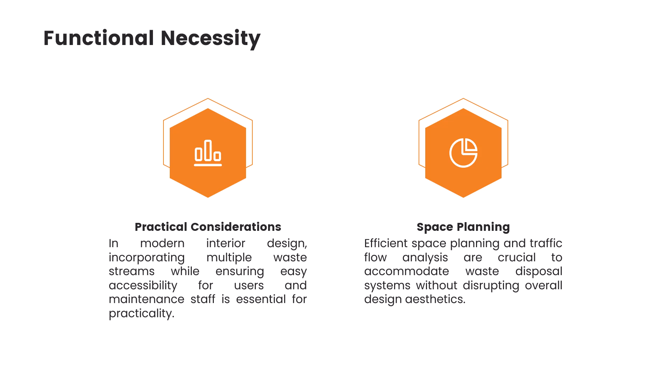So it is very much essential how we incorporate all the waste disposal systems along with the interior design aesthetics. It is a combination of both. We have to consider the waste part as well as the aesthetic part while designing interior projects.

Next is environmental responsibility. Each person is responsible for environmental concerns. For example, sustainable practices: we have to think about the economic factor, social factor, as well as the socio-cultural factor. In today's world, when talking about interior design, we are mainly focused on environmental aspects.

In interior design, sustainable practices incorporate features such as built-in sorting stations and smart waste management systems, to make recycling and waste reduction intuitive and effortless. It is very much essential.

Next is minimizing the environmental impact. Whenever we implement or execute spaces, we have to think about sustainable waste practices along with reducing the environmental impact while handling waste. It is very much essential.

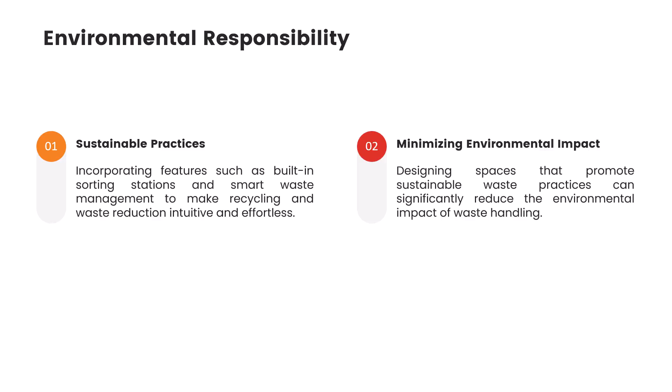Next is design aesthetics. Whenever we talk about waste disposal, there is a mindset that waste disposal always looks dirty—it's the ugly thing in the building. But it is the responsibility of an interior designer to make these elements aesthetically pleasing through interior design projects.

One aspect is visual harmony: creating waste management solutions that complement the visual appeal of spaces, like architecturally striking waste chutes and beautifully designed sorting centers. All the sorting centers, disposal elements, and refuse chutes should be part of our design.

Next is the innovative approach. Through innovative design solutions, we can make waste disposal systems part of the design aesthetics. Integrating waste disposal systems into the overall design scheme reflects innovation in balancing function and aesthetics. Waste disposal is part of function, while our main motive is to present everything in an aesthetic manner. We combine both to create an innovative design approach including function and aesthetics.

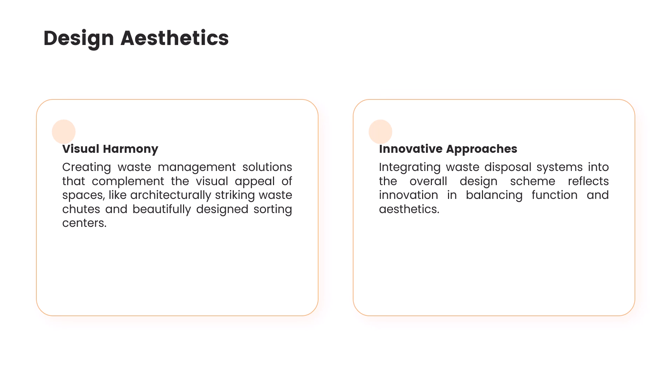Now the key concepts and terminology in waste disposal systems: the building services terminology or glossary.

First is the waste chute: strategic planning for vertical passages to ensure efficient and hygienic waste movement with minimal travel distances from waste collection points. In today's world, with the concept of vertical housing and high-rise buildings, it is difficult for each family or unit to go down to put waste in a container. So we have vertical refuse disposal systems, called the refuse chute. We have to consider hygienic waste movement along with minimal travel distance to waste collection points.

So it is very much important, and the waste chutes are the solutions for that. Now the compactor, a mechanical device for waste volume reduction, requires proper integration with building systems like compaction equipment. This is a particular kind of device where we compress all the waste to reduce its volume.

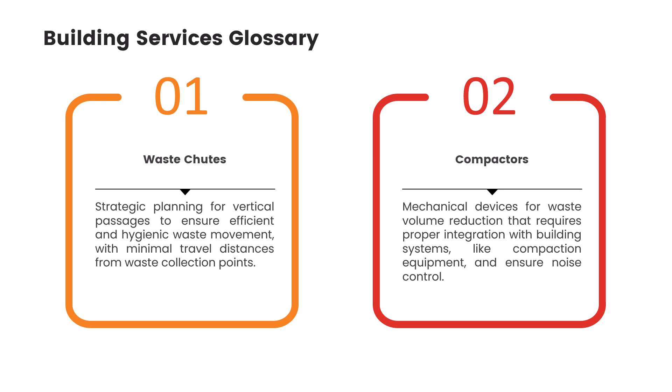As it is a mechanical device, it produces some kind of noise, so we have to ensure that it should not disturb the family members. We need to ensure noise control for that. These are some examples or visuals for chutes and compactors.

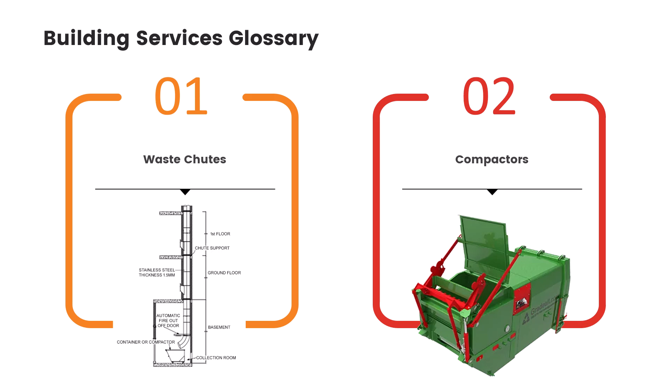Now the segregation and recovery systems. In segregation systems, different types of waste are there: wet waste, dry waste, sanitary waste, and e-waste. They have different color coding systems: wet for green, dry for blue, sanitary for red, and e-waste for gray color. So we have to segregate this waste systematically, and for that we need awareness, clear signage, and educational programs for proper waste segregation, so there should not be any problem when there is a compactor or waste segregation system.

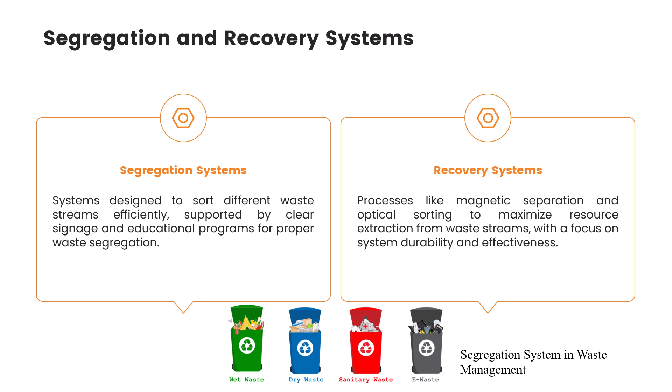Another system is the recovery system, processes like magnetic separation and optical sorting to maximize resource extraction from waste streams, with a focus on system durability and effectiveness. So we have to think about the system durability, the long term feasibility, and the effectiveness, so there should not be any disturbance while separating the waste. This is the management system for the waste.

Next, this is the overall scenario of how recovery systems in waste management work. First is from the house level, waste generation, from segregation of waste in separate bins, as I told you, in green, red, blue, and gray colors. Then waste transportation systems, then we have a transfer plant to direct landfill, where this waste can be used in the landfill process.

And there is a recycling process: organic waste, recycling waste, biogas in cylinders, biodigesters, fertilizer plants. This waste can be used for different purposes, like dry waste can be used for something, wet waste use can be something, and from the waste we can generate electricity from biogas systems. So these are the recovery systems in waste management, and these are very much helpful for our day-to-day life.

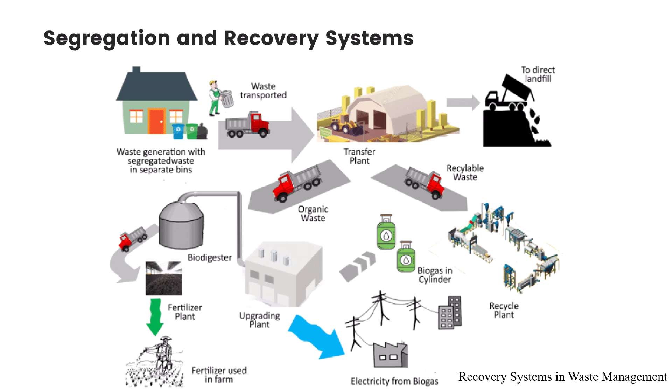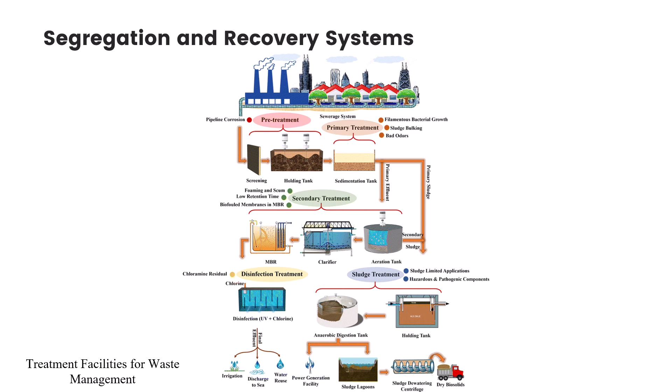This is another treatment facility for waste management. This is the overall flow of the diagram, so you can see and read this diagram.

Now we have principles of sustainable waste management. We have a particular term, the waste hierarchy. Hierarchy means we have to give some kind of priority to something. Priority is given to reducing waste generation, reusing materials, and recycling. This principle should guide the design of waste management systems from the start.

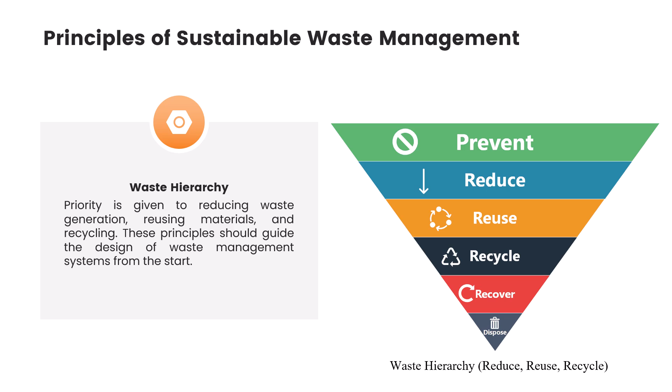So in the waste hierarchy, first of all we have to prevent something; we should not use such kind of waste which is not biodegradable. If it is not possible, then you can reduce it, don't use it, or we can reuse it. At the end we can recycle it. After recycling, some of the waste goes to the land, so recovery, and at the end dispose. This is the hierarchy of waste management systems that we should follow.

Next is another principle of sustainable waste management, the circular design thinking. We have natural resources, then extraction of raw material, then design and production, packaging and distribution, use and maintenance, disposal. In between we have disposal, recovery, reuse, recycle. So we have to follow all this hierarchical process and use sustainable waste management in a particular way.

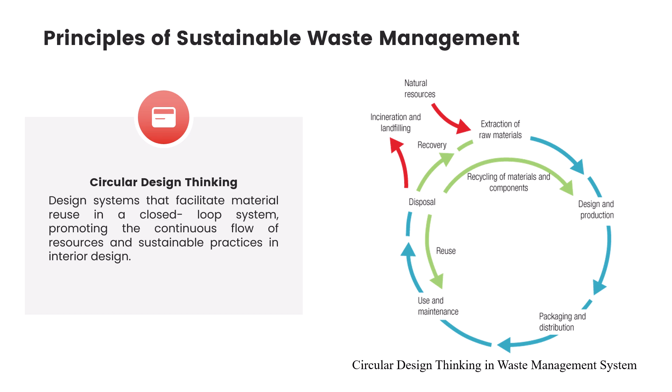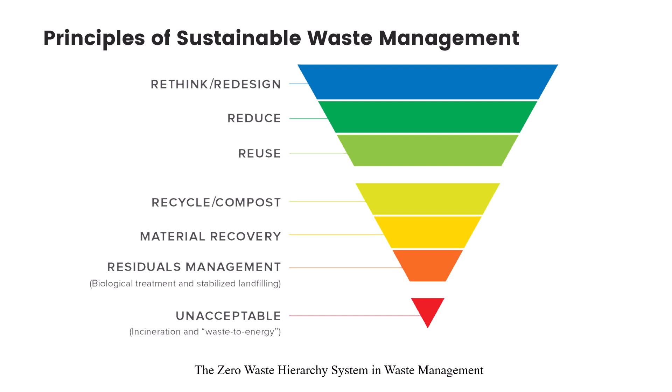This is another one, the zero waste hierarchy system in waste management: we have to rethink and redesign, then reduce, reuse, then recycle or compost, then material recovery, then residual management, like biological treatment and stabilization of landfill, and something we can say unacceptable, that is waste to energy. So this is the hierarchy for the zero waste hierarchy system.

There is another principle of sustainable waste management, the smart waste management system via IoT, Internet of Things. The acronym SMART stands for: S for specific, M for measurable, A for attainable or feasible, R for relevant, so our waste management should be relevant, and T stands for time bound.

So we have to think the smart way of waste management systems - reductions in collection cost, no missed pickups, proper segregation, reduced overflow. Whenever we have overflow, that overflow will land somewhere else. Then waste generation analysis - we have to allocate budget, labor, materials, transportation systems. We have to manage everything, so there should be a waste generation analysis so that we can allocate proper resources to a particular station. At the end we have to think about carbon dioxide emission reductions.

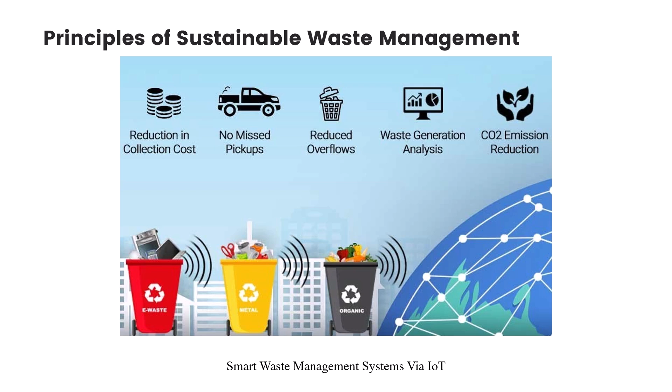So that is the thing for IoT, Internet of Things. We have to do all kinds of analysis of where the dumping ground is, and we should know when it is going to be full.

Next is the scope and objectives of the waste disposal systems. The overview of waste disposal - the first point is collection and segregation systems, which we have already discussed. Then transportation methods within buildings - within buildings we have refuse chutes, segregators, and compactors.

Then storage solutions. It is very difficult for the municipality to collect day to day from buildings, so it is advisable that buildings store waste for 2 to 3 days or on a weekly basis, and wait for the municipality transportation systems so we can dump it there.

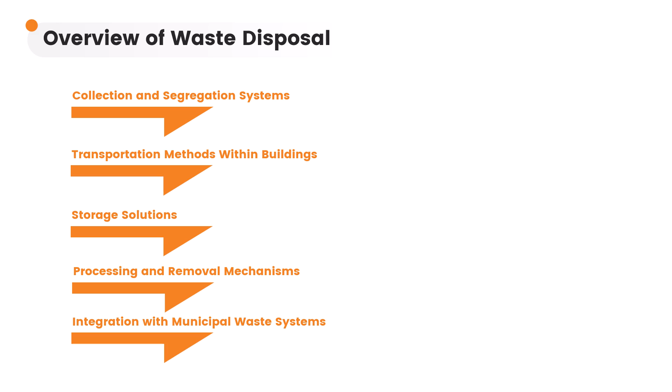Then the processing and removal mechanism - that is done by the management, the municipality people. Then integration with municipal waste systems - municipal to municipal, we have dry waste, wet waste, that is their duty. So this is the overview of waste disposal systems.

Next is the objective of waste disposal - why are we doing all this waste disposal or waste management? The first point is maintaining hygiene and public health standards. If you are not collecting waste properly, there will be different types of diseases and unhealthy situations.

Then next is maximizing operational efficiency. Operational efficiency means, as I told you, budget, labor, materials - we have to think about all these things in an efficient way.

Next is minimizing the environmental impact. We should not harm the local environment - for that we have to do waste disposal systems, waste management systems.

Next is ensuring aesthetic integration with design schemes, whether interior or exterior. We have to think about aesthetics as our priority as an interior designer or architect, so these waste management systems must integrate with both the function and aesthetics of the building.

Next is supporting sustainable building practices. Now we have different types of star rating systems for buildings - for getting a 5-star, 4-star, or 3-star rating, we need proper waste management systems to support sustainable building practices.

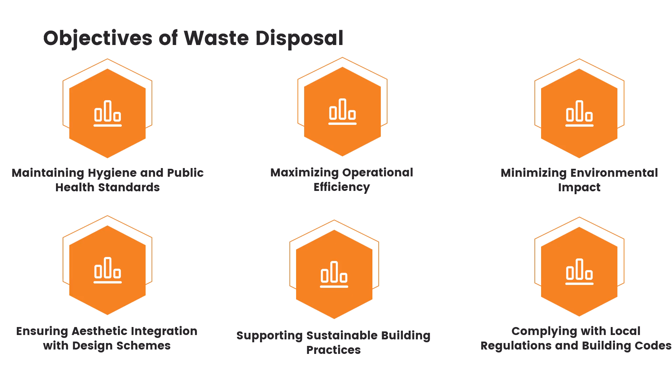Now the different types of waste disposal systems. One is recyclable materials - waste that we can recycle and reuse for different purposes. Then organic waste, which can be used for agriculture. Next is general waste, which can also be recycled. And hazardous materials like e-waste, which is most dangerous and should be handled with proper care during solid waste management.

Next is liquid waste management systems, the gray water systems. Gray water is the used water from kitchens and bathrooms. Then there is black water management - black water is used for excreta. So one is called sewage and sewerage, and sewage refers to the gray water systems.

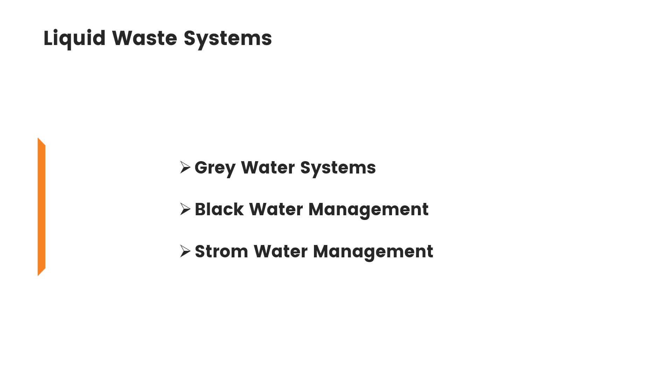Sewerage is the black water management system. Another is storm water management. Whenever we have a building, the rooftop collected water should not run away from our site, it should be used on our building site itself. For example, we can use it in the landscape part, fire emergency part, for flushing, or as part of black water management systems. We can use storm water in black water systems, and sometimes we can refine it and use it in gray water systems too. There is also specialized waste - medical waste in healthcare facilities, chemical waste in laboratories, food waste in hospitality industry settings. We have to take care of all this waste effectively for sustainable development.

Now the importance of building services in waste disposal. Integration with building mechanics - for example, vertical transportation, we have lifts, we have staircases. Near the lift or staircases, we have vertical transportation for the waste, for example refuse chutes. Then continuous vertical alignment and structural considerations. During structural calculations, architects should think about the function of waste so they can provide particular refuse chutes as part of other structural management systems.

Then the ventilation systems and odor control. This is most important whenever we are disposing our waste. The ventilation systems and odor control, wind directions, sun directions - all this comes into play. So we have to think about the ventilation systems and odor control.

Next is the load bearing considerations for terminal points. At the end, we have to collect all our waste in particular disposal systems. These disposal systems collect together and are passed to transportation systems like municipality trucks or hand pull systems. We have to collect and deposit that to the municipality trucks. So how to carry the load and manage all these things is also important for a designer.

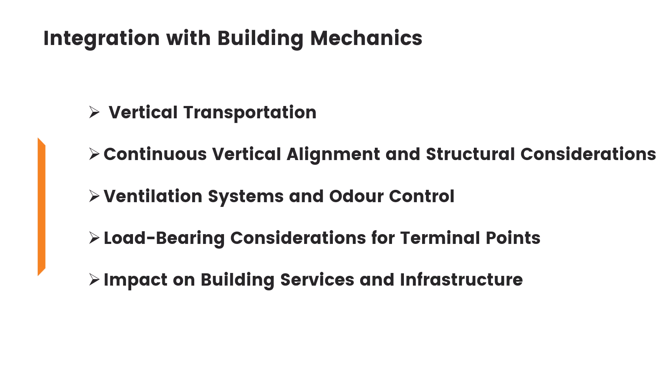Now, impact on building services and infrastructure. Overall, this should not give more impact on building services and infrastructure. Waste is something tangible, we can carry it from one point to another. For that we have manual systems and mechanical systems. At the end, it should not give more impact on building services and infrastructure - something we have to hide, but use in a proper way.

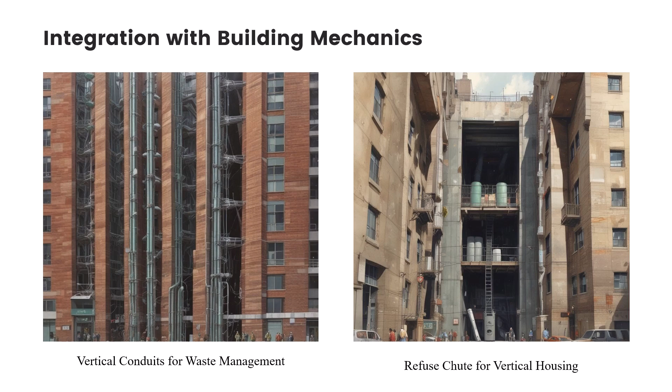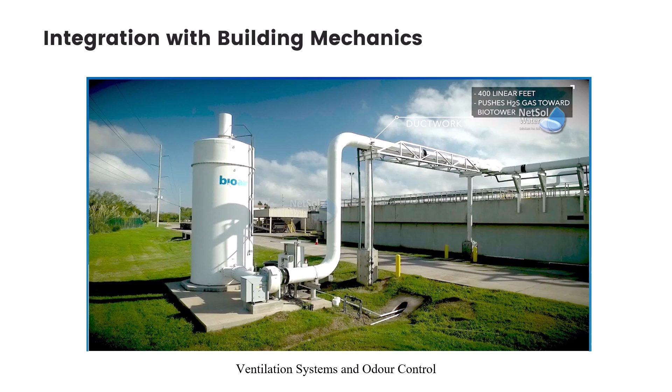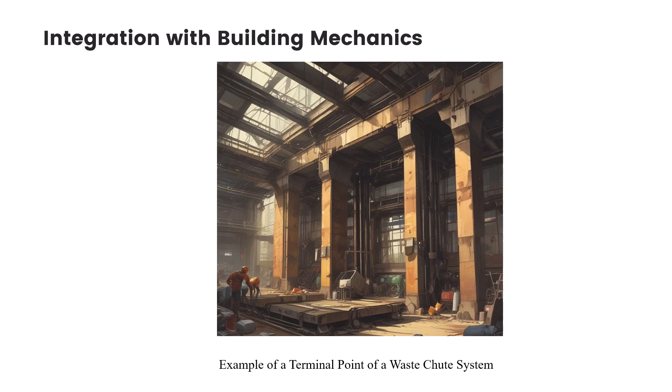These are some examples or images like vertical conduits for waste management. These are the refuse chutes for vertical housing. This is the ventilation system and odor control wherever we have bio-air systems. We have to consider all these things for odor control and smell control. Example of terminal points of waste chutes - it should be collected in such a way that it can be easily transferred from one place to another.

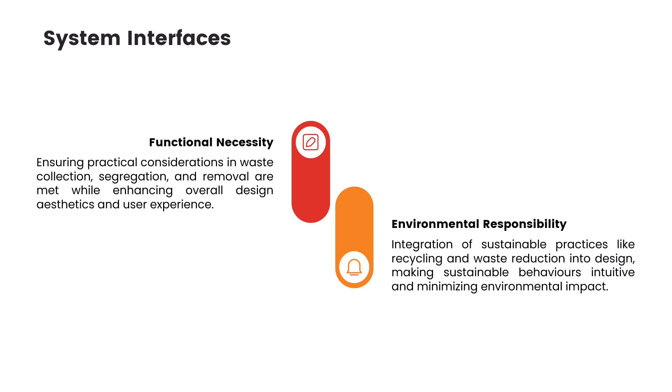Now, since system interface, like we have to have our IoT, Internet of Things, ensuring practical considerations in waste collection, segregation and removal are met while enhancing overall design aesthetics and user experience. Another is environmental responsibility - we have to be responsible for the environment. Integration of sustainable practices like recycling, waste reduction into design, making sustainable behavior intuitive, and minimizing environmental impact. We have to think about net zero carbon systems in our building.

Then space allocation for waste management facilities and collection points - the efficient design of collection points including floor to floor level, housing unit level, then central waste rooms to manage waste efficiency, then building level, building to building level, then site level. All these collection points should be designed carefully.

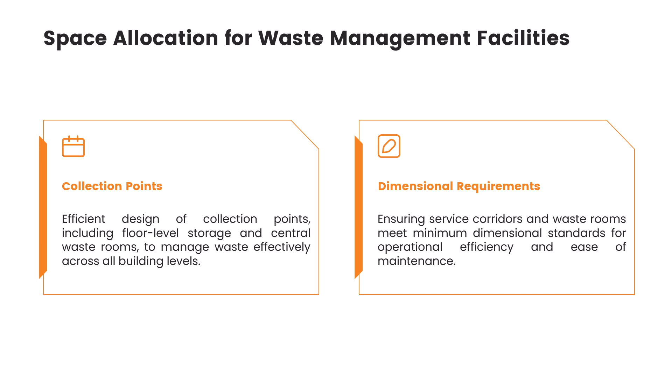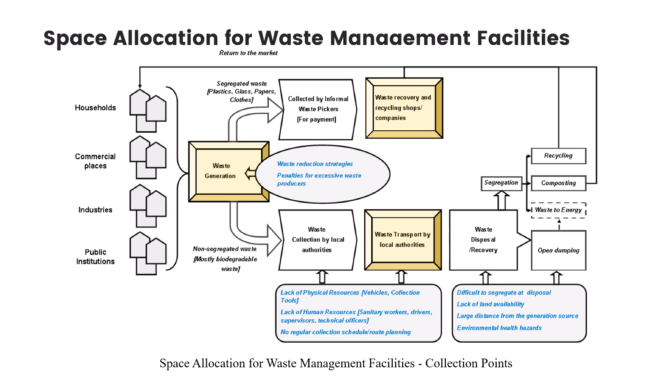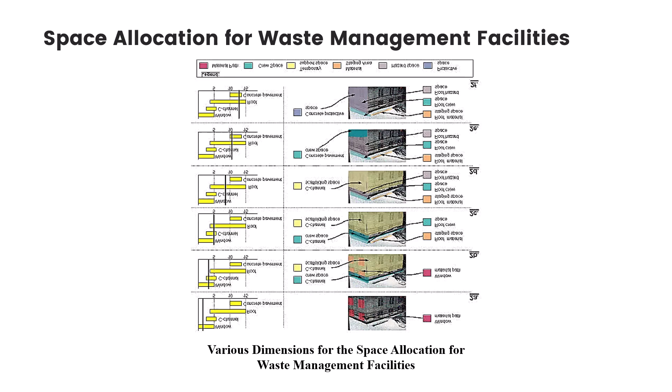So these are something like 3D MEP coordination with mechanical, electrical, and plumbing systems. For mechanical, we have different types of waste: dry waste, e-waste, industrial waste, hotel hospitality waste. These are carried out through a combination of mechanical, electrical, and plumbing. Overall, we can say it is MEP systems. In MEP, there should not be any disturbance or overlapping between the mechanical, electrical, and plumbing systems, so we have to consider all these things while planning waste management facilities.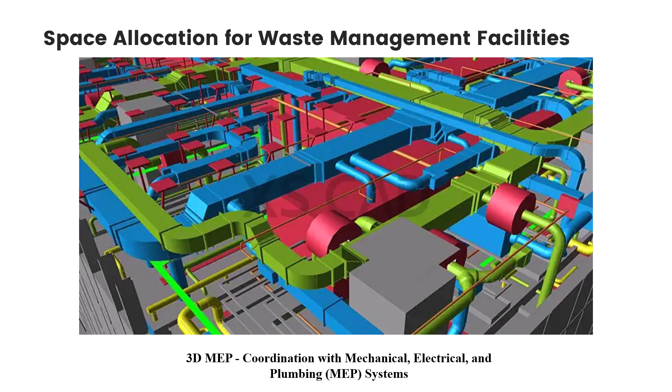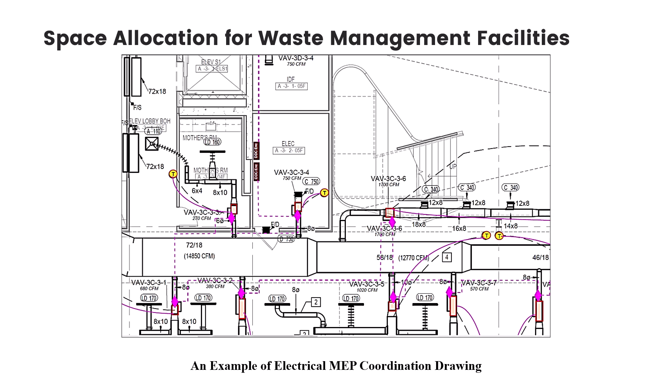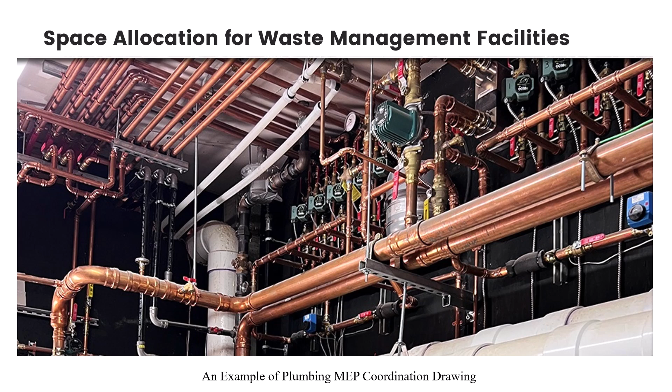These are AutoCAD layout drawings, electrical MEP coordination drawings, showing where we should have our electrical points and their use—we have to think about all these things simultaneously. These are examples of plumbing MEP coordination drawings, the 3D view of plumbing systems. So overall, electrical, mechanical, and plumbing—everything we have to consider as a whole while considering waste management.

In every building service like waste disposal, everywhere we have some kind of limitation and challenges. So how do we overcome that? Let's discuss the space constraints in urban buildings. People are thinking more about minimizing their spaces, and at that time they are not thinking about the services part, especially waste disposal. So it is very much important.

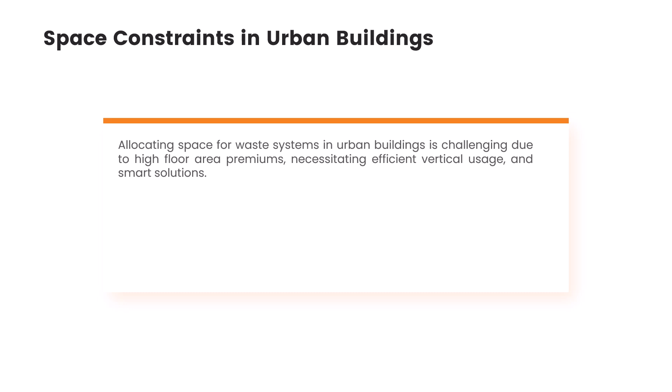Allocating space for waste systems in urban design is challenging due to high floor area premiums—all floor area is very costly, so thinking about waste disposal is often neglected, necessitating efficient vertical use and smart solutions. These are the ways to overcome this in urban buildings.

Now, integration with existing infrastructure. Every day we have upgradations of building services systems. Adaptation of modern waste systems into existing buildings involves overcoming structural and utility limitations, requiring substantial modifications and careful planning. At the end we have to do it, but it is a challenge integrating modern waste management systems with existing infrastructure.

Now, maintenance accessibility—in urban areas we have very compact buildings, so accessibility is an issue for waste management. Ensuring regular system maintenance without disrupting building operations demands accessible design and strategic placement of service corridors and maintenance spaces. So we have to consider this particular thing, maintenance accessibility.

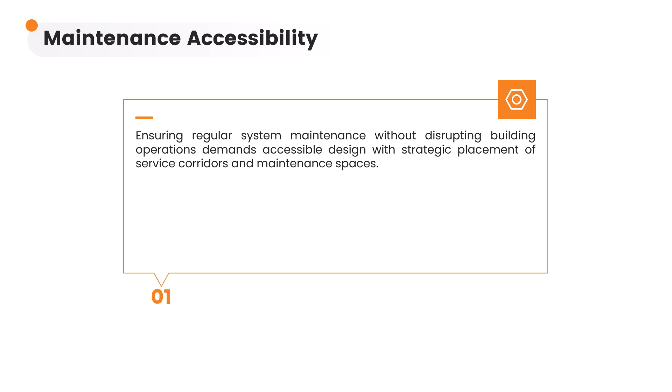Now the SWOT analysis—what are the strengths? Strengths are like improved public health hygiene and enhanced building efficiency. These are the strengths of our waste management systems.

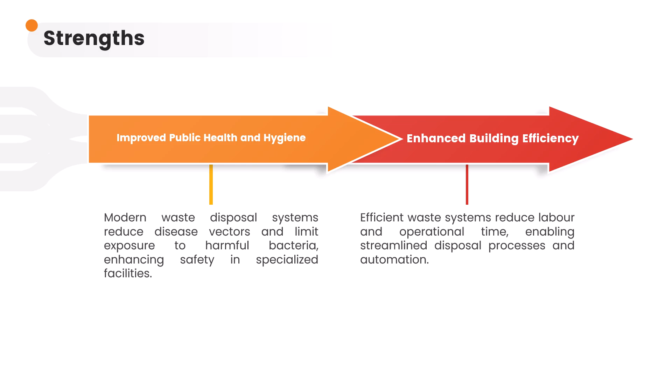The weakness is high initial implementation cost—whenever we provide modern waste management systems in our building, it is a little bit costly. So the initial implementation cost is very high. However, the payback period is also very low, so we have to consider this thing.

The space requirement—again, as discussed, in urban areas we have very limited space. So for considering waste management systems, we have to think the SMART way: specific, measurable, attainable, relevant, and time-bound. These are the weaknesses, and smart solutions are the way to overcome them.

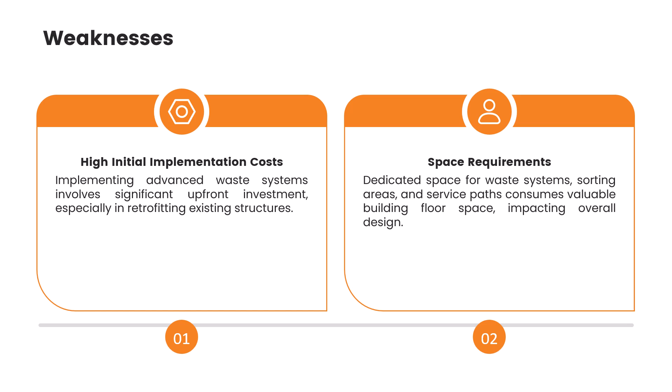Opportunities are the futuristic fix—innovative sustainable solutions. Day to day we have upgradations in waste management systems, so waste processing units that integrate well with modern design are the innovative solutions. Innovation in sustainable solutions is our futuristic focus: how to reduce sizes and develop highly efficient mechanical, electrical, and plumbing devices.

MEP systems—coordination between electrical, plumbing, and mechanical devices is very essential, and that is the future of our waste disposal systems. Now, smart technology integration, IoT systems are there.

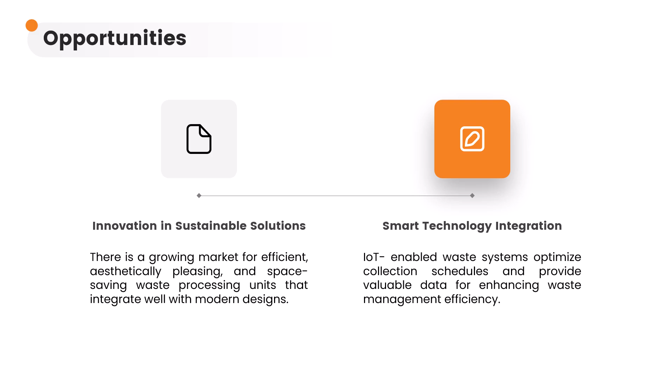From the system itself, we should know where we have maximum waste and where to put different waste bins. These waste systems optimize collection procedures and schedules, and provide valuable data for enhancing waste management efficiency—how to use maximum labor, how to optimize time and cost. Overall, optimizing cost, time, and labor is what smart technology integration with the help of IoT provides. That is the futuristic opportunity for the waste management system.

Now, there is always a threat in the future: challenging regulations. Every day in our life, regulations involve things like projects—projects run for 1 to 2 years, programs run for 2 to 3 years.

Then we have a comprehensive plan, and a master plan for 20 to 30 years. Every day there are changes in regulations—evolving waste management legislation could necessitate costly system updates, which may render existing systems non-compliant and obsolete. So with new rules, regulations, and building bylaws, old systems may become non-compliant or obsolete, and we have to take approval with new management systems. So there are challenges and threats we have to consider.

Now let's discuss some case studies. In commercial building systems, integration with building management systems and implementing automated waste sorting are the two major things we have to consider.

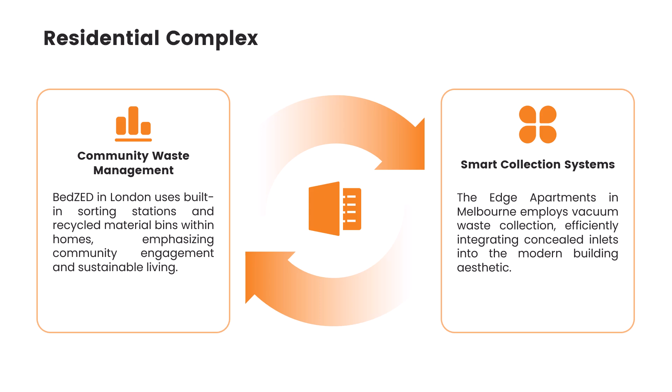This is the innovative design we expect from students of architecture and interior design—to use function and aesthetics combined, integratively. That will be the future of waste management systems in our interior design services.

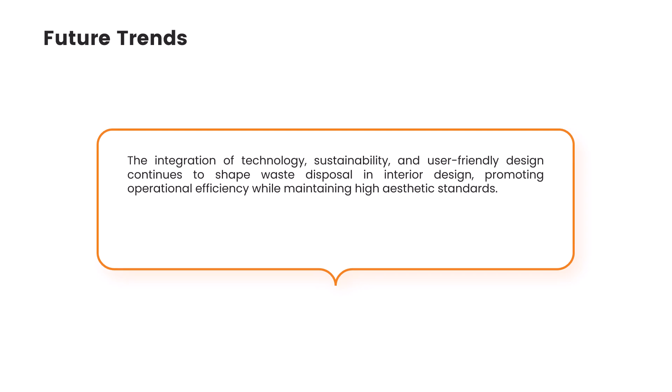Conclusion—let's see the conclusion. The future trend is always there: the integration of technology, sustainability, and user-friendly design continues to shape waste disposal in interior design, promoting operational efficiency while maintaining high aesthetic standards. That is the most important thing.

Then sustainable practices—we have to think about the environment and the economics. It is also the responsibility of socio-cultural cohesiveness to integrate innovative design and modern technology to create efficient, eco-friendly waste management systems that align with contemporary architectural and interior design goals.

Now, balancing technical and aesthetic needs—as I always discuss, the functional and aesthetic combinations, along with the technical things we have to implement into our waste management systems. Achieving a balance between technical requirements and aesthetic considerations is essential in developing successful sustainable waste disposal systems in modern interior design.

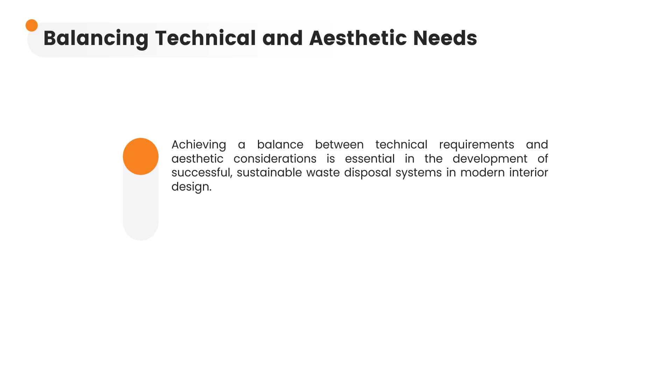So these are the conclusions for waste management systems in interior design, and some parts are relevant to architectural people also. Thank you for your patience in watching this video.